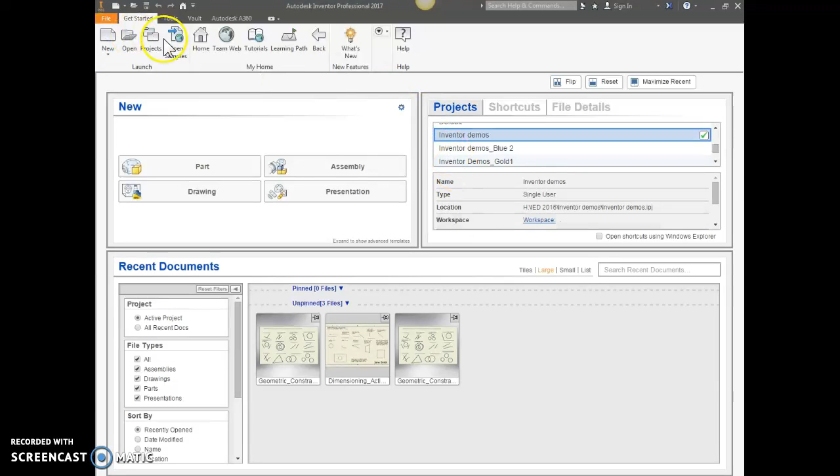And the assignment says to make an IDW of this part, but we have to do a couple things in the IPT first. So let's let my computer do its thing. Alright, in the Puzzle Cube project, a lot of people messed up their front views. So we're going to select our front view first, and we need to remember those 3 rules for a front view. No hidden lines, the most information, the longest dimension.

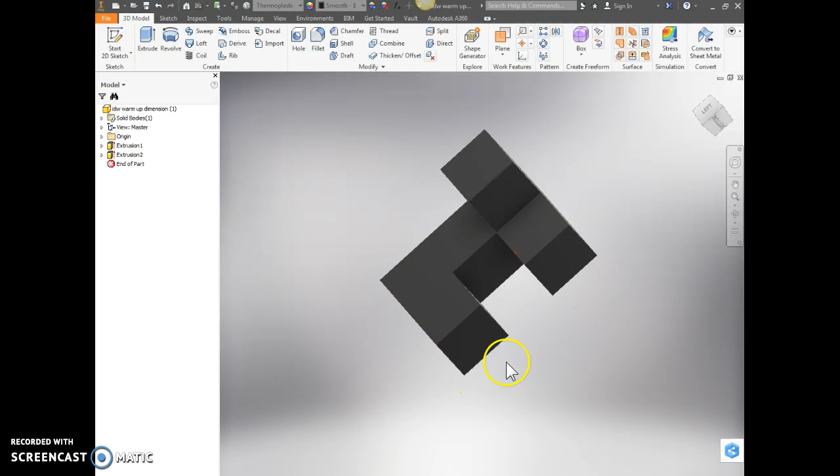So if I'm looking at this, I think that this face is the best front view because it's the longest dimension. I can see everything. There's no hidden lines on there. So what I'm going to do is I'm going to take my Look At tool, which is right here, and I'm going to click any one of those faces that's in the front view. And then it'll move it so it's facing straight at me. I would like for it to lay flat, so I'm going to rotate it so it's laying flat.

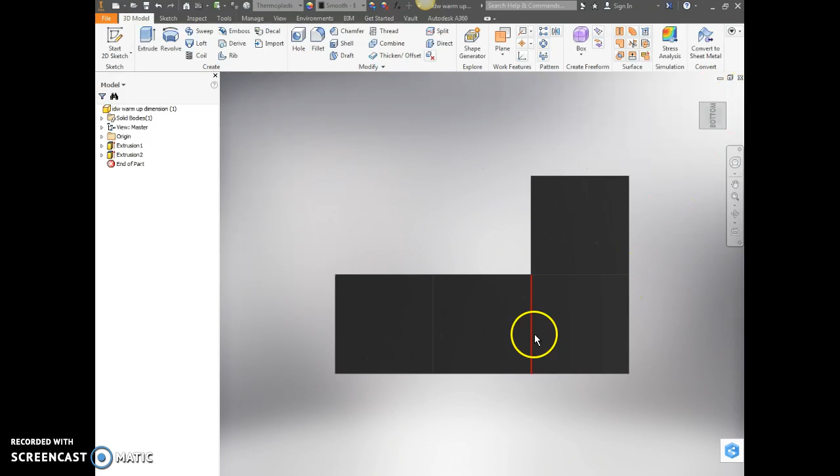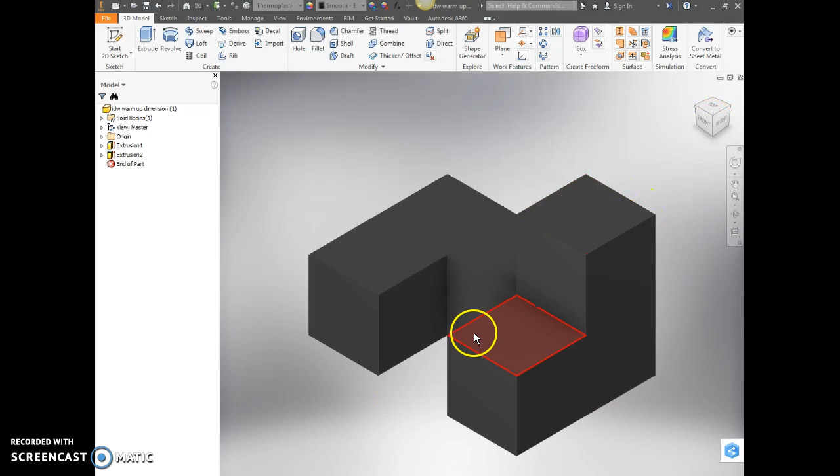And then I'll go up to my view cube, right click on this, set current view as front, and then I'm going to click in the top right. So I have my top front right view. Remember, that's the way that we want to show isometrics, is top front right. I'll right click on that, set current view as home to fix distance, and then save this. And now I'm ready for my IDW. So I'm going to go ahead and just leave this open.

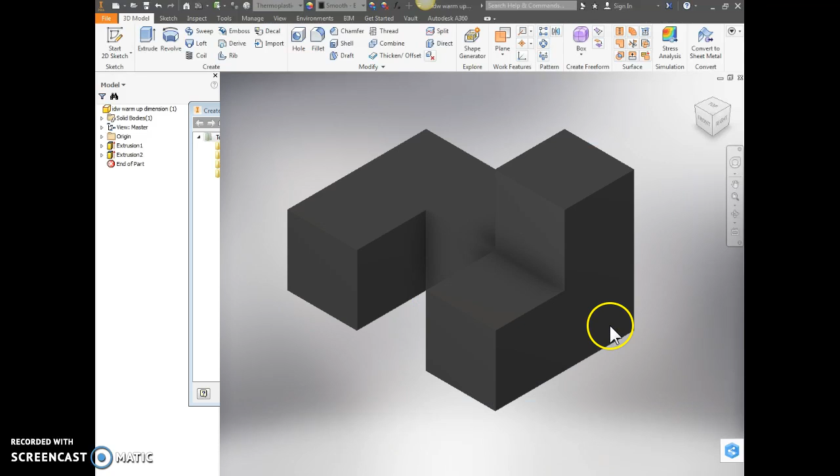I'm going to go up here to New, and I'm going to choose any IDW. If you want to use your template, that's okay. Let's use a drawing size C for this one, like we did for the Puzzle Cube. So I know that this one's a C, so I'm just going to open my template. Once it opens, I'm going to check right here that it is a C. If I want to add my name, I can go up here to text, and I'll just put Mr. Devlin, and I can change the font here to 0.5.

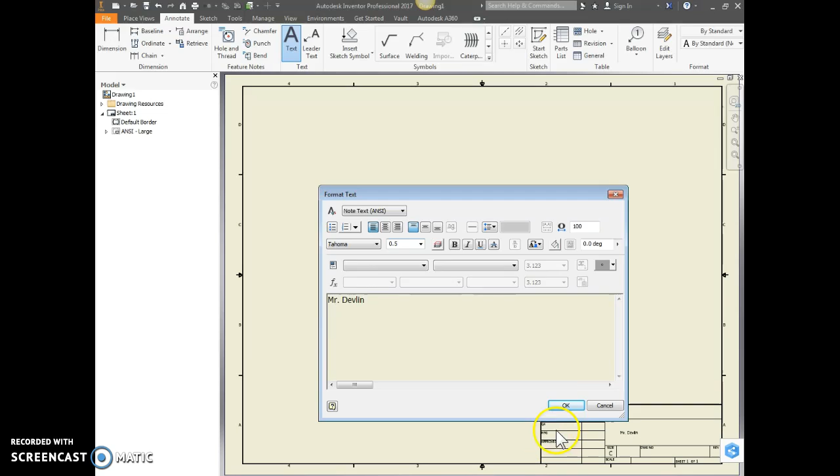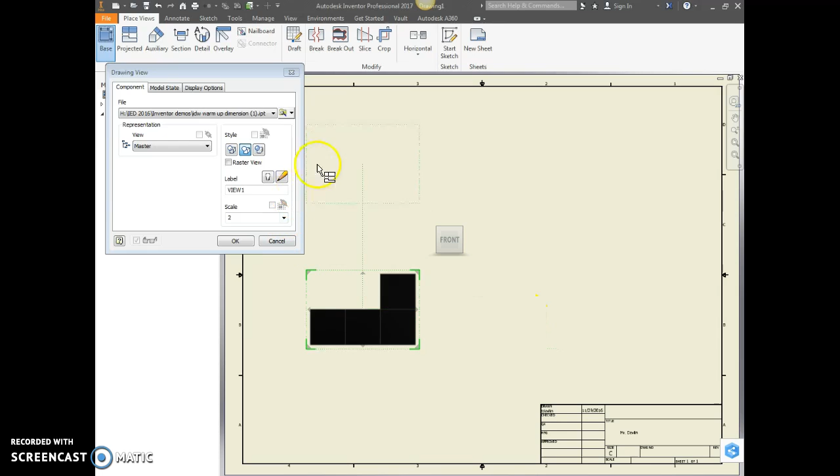Okay, now I'm going to place my view in. So I'm going to go to Place Views, select Base, and I'm going to use 2 scale just because it fits better with these size shapes on a size C document. Now, once I click and place my front view, it's going to let me place my other views. So I'm going to go ahead and put my top view in, my side view, and my isometric, and then click OK.

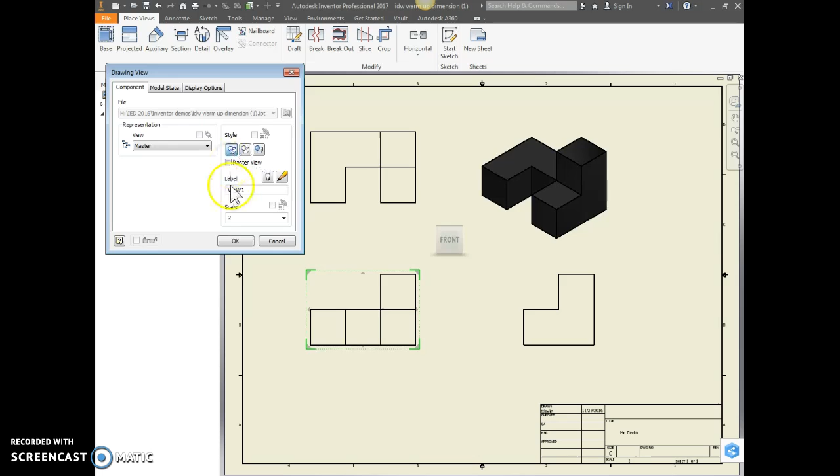Now, all these are wireframe, so we always want our isometric shaded. So double click on this, make it shaded. It doesn't look like anything, but once I click OK, it's shaded. And then also make sure that these have your hidden lines shown. You can toggle that on and off. So this has hidden lines removed, so I'm going to make sure it shows hidden lines and then click OK. And I do have some hidden lines there because I want to be able to see that.

Now I'm going to dimension, and I think a lot of people made this a lot harder than it is. So the first dimensioning thing, I want to do my overall dimensions. So me personally, I like to have my width in the front view, my depth in the top view, and my height in the side view if I can. So I'm going to go ahead and put my width in. I'm going to give it some room. Just click OK. And then I'm going to do my depth here, and then my height.

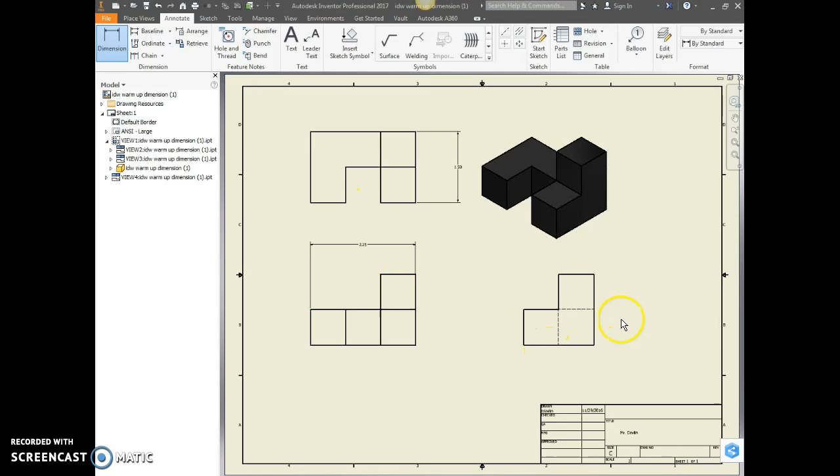Now I purposely chose a pretty complicated part in the way the puzzle cube goes because there's more dimensions. So when I look at my width first, I see that there's 1, 2 different separations in here. That means I'm going to have 2 dimensions, or I know that if I go all the way across the part, I have 1, 2, 3 things that need dimensions. I already have my overall, so I need at least 2 more. So I'm going to show this dimension, and then I'm going to show this dimension.

There's a bunch of different ways you could do this. This one totally takes care of it. Sometimes because this is a feature, I would want to dimension this one and then leave this one, or I could even move this one up if I wanted to. But now I know that I can find this line with that dimension, and I can find this line, and I know the overall width. So this part is fully dimensioned.

Now if I go up to my top view, there's only 1 line. So that's 1 dimension, 2 dimensions. I already have 1, so I'm going to need 1 more dimension. So I just need to show how far this is. So I'm going to put 1 dimension there. And then for my height, same thing. There's 1 line in the middle. So I need to show 1 more dimension. Alright, now this part is fully dimensioned. I'm inside the adjacent views. I follow all my guidelines.

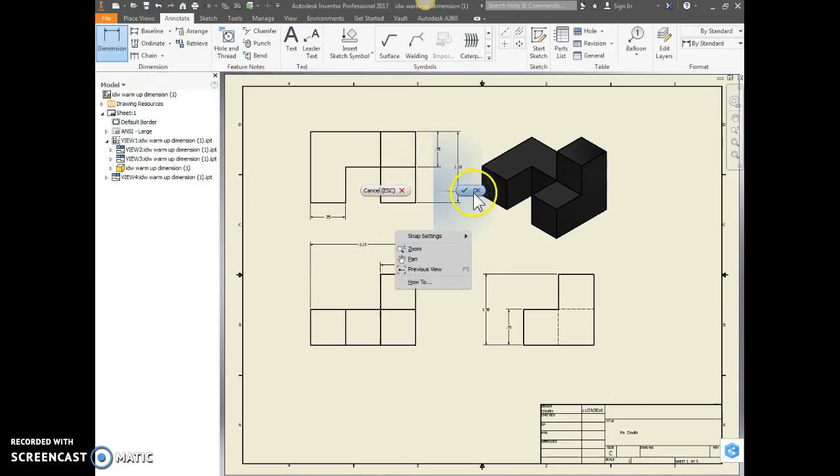Now I could change this around. I think if I was doing this for someone, I might show this dimension there because it's on the feature. I can't tell what this is. But other than that, I feel like this is pretty good. I might also, I could put the dimension on here, because that's the same thing, that's the feature. But all my guidelines are followed here, and this looks pretty good. Alright, that's it for this video.